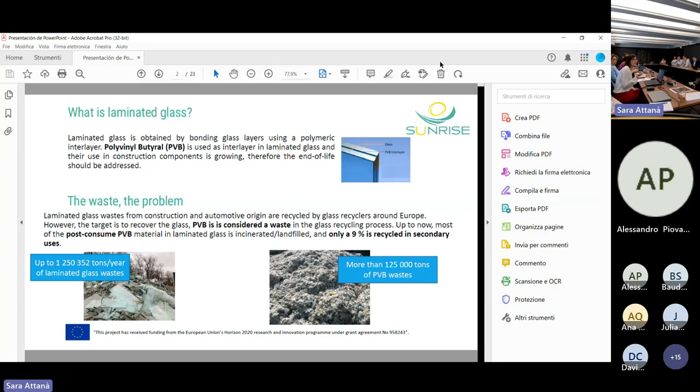This material in the recycling process is mostly considered a waste, because most of the time it ends in incineration or landfilling, and only a very small percentage is recycled. So what are the challenges for circular PVB recycling? There is some small recycling in minor applications, but the challenge is to recycle it for the same application or for a high quality application. Here there are 3 challenges we identified, but there could be more.

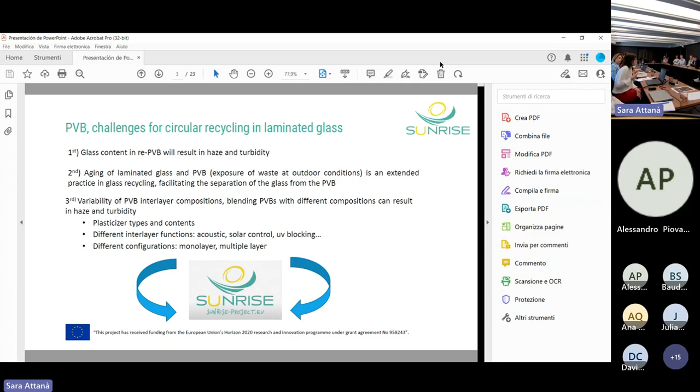One is the glass content in the recycled PVB, which results in haze and turbidity. The second one is the aging of the laminated glass and the PVB, because of the use phase, but also because sometimes it's aged by the recycling process. And the third challenge is the variability of PVB compositions. When we obtain this waste, it's a blend of different types of PVB, and could be a blend with other polymers which are not PVB. These different compositions and functionalities make it difficult to use it again. So this challenge created this project, the Sunrise project.

Some data about the project. This project was created during the pandemic, so we were very inspired by the pandemic in our houses writing. The starting date was 1st June 2021, and it has a duration of 3 and a half years.

We are now in the second year of the project, so we have one year and a half more of work to do. We are 20 partners in the consortium. The global budget is 9 and a half million, more or less, and the contribution from the European Commission is around 8 million. And Lurederra Technological Center is coordinating this project.

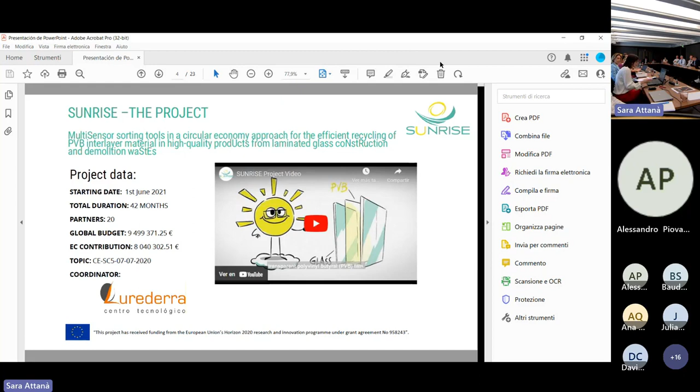Some background about this. Lurederra was working in the past on PVB recycling, not with the focus of this project, which is developing these sensor sorting tools, but was working in this recycling. Lurederra is a technological center, and we have different areas. Within these areas, we have areas related to recycling and environment.

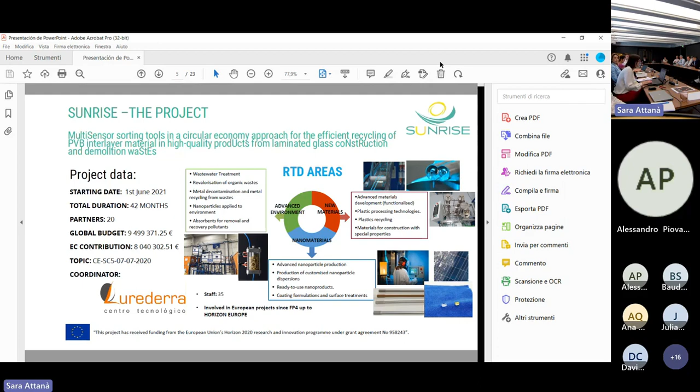In these areas of recycling, we work in recycling of different types of materials, some waste, electronic waste, biomechanical and solvent extraction processes, but we also have some areas related to materials, for example, plastic processing. So these areas mean that Lurederra has this knowledge and could act as coordinator. Also, we have some expertise from FP4 in European projects, so we sometimes have this role in projects as coordinator.

So once I have explained the background of why we are here today with this project, I will go to the structure and objectives. This project has four parts. One is we have some recyclers in the project, which work not only in the initial phase of the project, but also throughout the whole duration. Then we have a part related to the optimization and design of the recycling line. The project is based on developing a sorting system which can classify the PVB into different categories, the PVB while still in the glass, so we sort the laminated glass by PVB differences.

So this is the phase we have been involved in up to now in the project: the design of the sorting system, the methodologies, and also the optimization of the mechanical and chemical blocks. Now we will start the processing part. We will obtain PVB flakes categorized by different aspects, which I will comment on later. And we will make different formats for the different applications, like pellets, film, or dispersion.

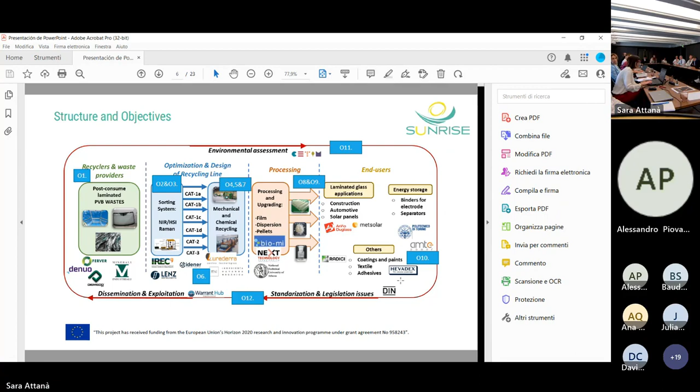And finally, we have an end phase related to the end use of these formats in different applications, for laminated glass, but also for energy storage, coatings and textiles. So these are the four phases of the project. We also have some global aspects related to standards and dissemination. This is our methodology. We have structured this work in 9 work packages.

Right now we are in the 24th month, so we have closed work package 1 regarding definition, and mostly closed work package 2 regarding the offline characterization of PVB, the methodology development, and the chemical and mechanical pilot line testing. We have also mostly closed work package 3 regarding the design, optimization, and construction of the sorting system.

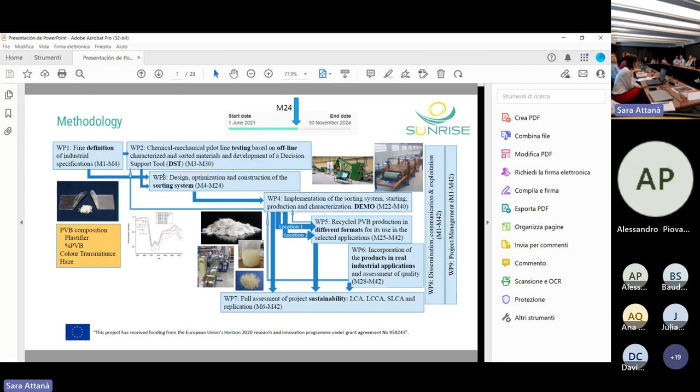So now I'm going to try to explain the most important objectives and where we are now, so that you can see the status. The first and most important objective of this project is to develop this multi-sensor tool to construct this system, which includes mechanical feeding, cutting, and positioning modules coupled to a multi-sensor tool, which subsequently goes to an actuator module to divide the different types of glass. This sorting system allows fast inspection and assessment, lower than 25 seconds, and it is a prototype, but we are aiming for 100 laminated glasses per hour.

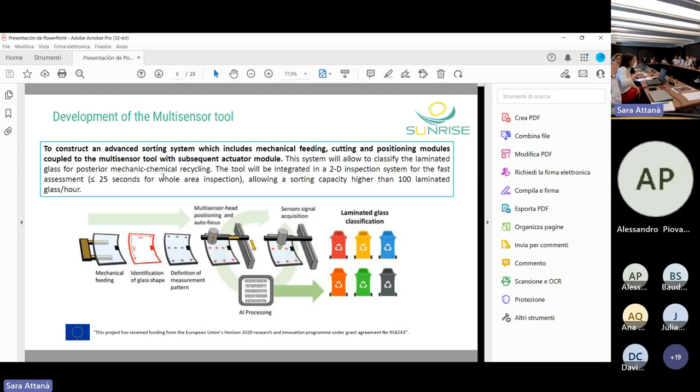So how does this work? This is configured as a step before conventional recycling. We assess the glass; this is a picture of a windscreen, but it could be another type of glass. In the project, we assess a sample, not the full windscreen, but it will be extrapolated later. We measure the windscreen, the sensor identifies the category according to PVB composition and quality, and then makes its decision and classifies it into a category. This could be a pre-sorting step in conventional recycling, by batches, for different treatment of the batches. So this is the idea of the sensor.

So what has been done in the project? The methodology we have followed is first to make offline characterization of PVB from reference materials and from waste using offline characterization techniques, including infrared spectroscopy, NMR, TGA, and others, in order to have a first database with the characterization results.

And in parallel, the PVB within laminated glass has been characterized by spectroscopic techniques. Different spectroscopic techniques have been used in the project, like Raman, NIR, transmittance, reflectance, fluorescence, and point spread function. And we selected among these for assessing our criteria. Right now, the selected ones are Raman and NIR spectroscopy, which can identify whether it is PVB or not, and can also identify the plasticizer type.

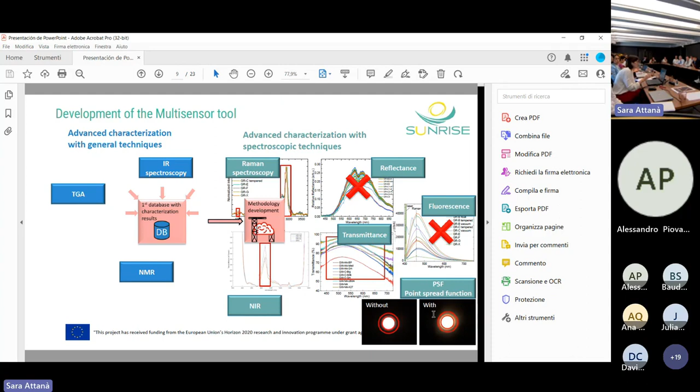For the degradation, according to transmittance and yellowness and haze, we evaluated with transmittance spectroscopy, and the haze can be assessed with a point spread function. So this methodology, developed according to these sensors, has been optimized and now this multi-sensor tool is being constructed.

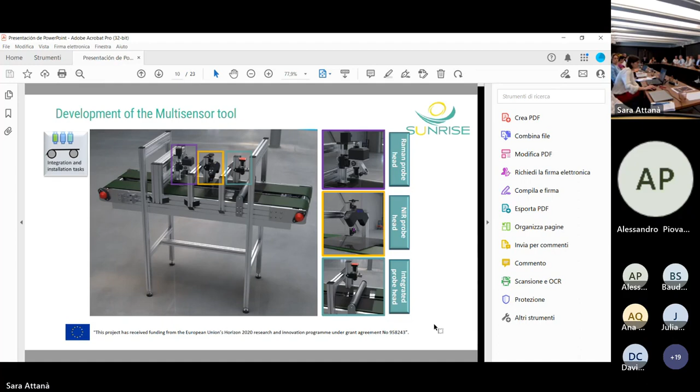Now something to comment about the sorting categories we have identified. According to this characterization, we use, in addition to the sensors, some artificial intelligence algorithms for assessment of the laminated glass waste, correlating the data with the target properties and sorting the laminated glass waste into different categories. I will explain these categories now.

The multi-sensor tool will identify category one, a high quality laminated glass waste which will be PVB, and in addition assess that it is high quality. The criteria of quality is done according to haze and yellowness, both giving similar results, so we identified haze as a faster measurement, setting a threshold of haze below 20%.

Within this high quality category, we will have different categories according to the type of plasticizer. We made a database of plasticizers, and in the final assessments we saw that most of the waste and materials have 3-ethylene glycol ethyl-hexanoate plasticizer, but in some occasions there are mixtures of this with other plasticizers. So we will probably have category 1A for only one plasticizer and 1B for a mixture of plasticizers.

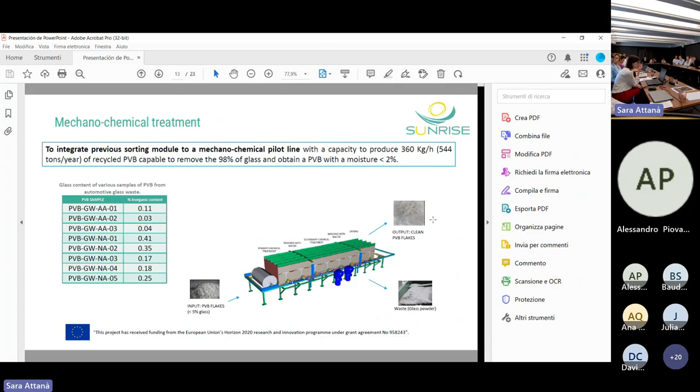In construction it's more challenging. It depends a lot on the variability of these wastes, because when we have very thick glasses, this also makes the process more difficult, but probably the mechanical conditions will be more improved. So that's about the mechanical recycling, mechanochemical, sorry.

Another objective of the project is related to the construction of a software tool, a decision support tool, for optimizing the recycling process.

The mechanochemical processes are modeled with semi-empirical equations that correlate well - first correlated with literature data, and now are going to be correlated with experimental data from the project. These equations will be modeled and programmed in a Python library.

This will then be connected to a web app constructed with Blazor. This app will allow the user to optimize the parameters according to, for example, how the content is in the beginning of the glass and how I would like to obtain it in the end - so to optimize the parameters according to the characteristics of the waste.

Finally, regarding technical aspects started just now - most of the work has been done on the sensor and methodology, but we have started preliminary tests of granulate and film production. Not with sorted material, because the system isn't constructed yet, but with mixed material, only classified as automotive or construction waste.

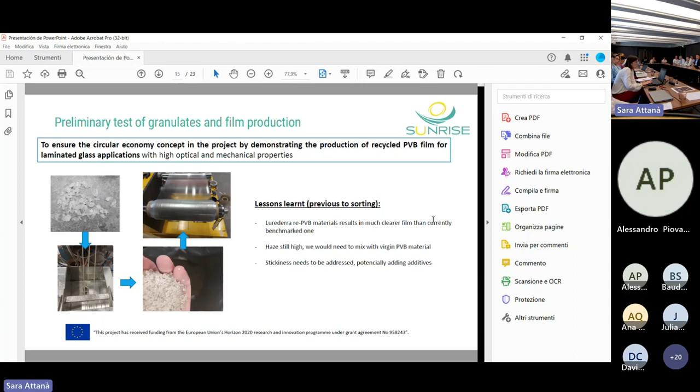Now we are entering the phase of the project where we are going to process this recycled PVB flake in order to additivate it for a new life. We will go more into this next year.

Other applications are another objective of the project - to revalorize other PVB fractions for other applications in coatings, carpets, and energy storage. I will not go deeply here, since some of the partners will present today, going into planning on this part.

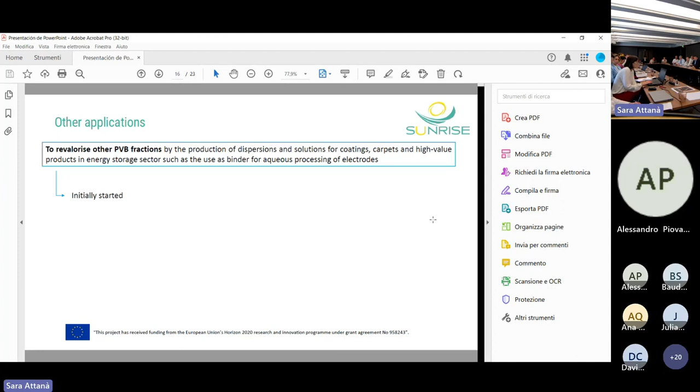Finally, regarding the first initial techno-economic and environmental outcomes, this work package about sustainability ran in parallel for most of the duration of the project. What we plan is to assess the economic and environmental impacts compared to current end-of-life scenarios and virgin production of PVB. So we planned some comparison of the process in that way.

Then we can compare with the current PVB end-of-life scenarios, like incineration and landfill. As the conventional recycling target is the glass, and as commented with Ferber, it will be separated, our steps are focusing on the PVB.

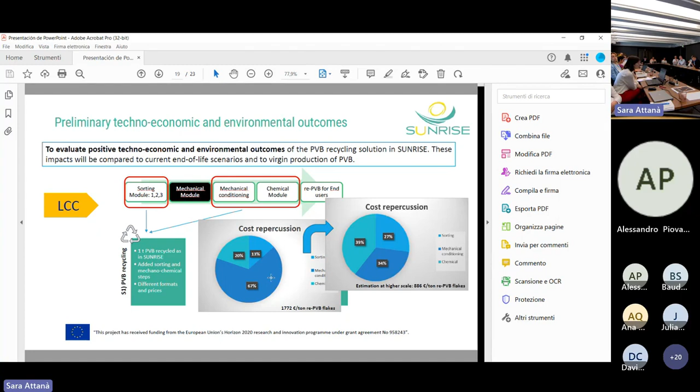Here we compare with some market prices of other recycled PVB flakes, and we were very close — around 1,000 euros per ton for recycled PVB flakes in the market from some providers. So we think this could be a very good opportunity. Of course this has to be reviewed, not only with estimations at higher scale for the mechanical part, but also for the sorting part, since we could extrapolate that to higher output too.

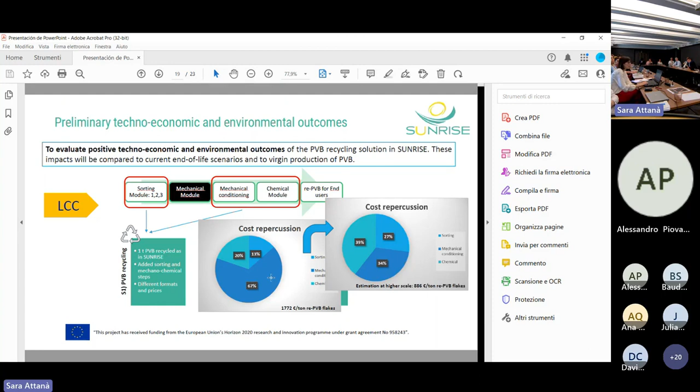We should also consider the benefit side, since these figures are costs only, without benefits included yet. But the results indicate that it's not just a matter of price — it's a matter of the PVB we obtain having real technical value and a market. So we could obtain this. Finally, to close, all this work I have presented has been done by the Sunrise project, which is a team of 20 partners.

I will mention the partners, divided by research partners: Lurederra, IREC, National Technical University of Athens, IDENER, Politecnico di Torino, and Next Technology Tecnotessile. Then we have business partners: equipment providers like Lenz and Ingeniería Navarra Mecánica in Spain, both of them. Then waste collection, materials recycling, and materials producers in the project: Minerali, Dismeco, Ferber Association, and Biomi.

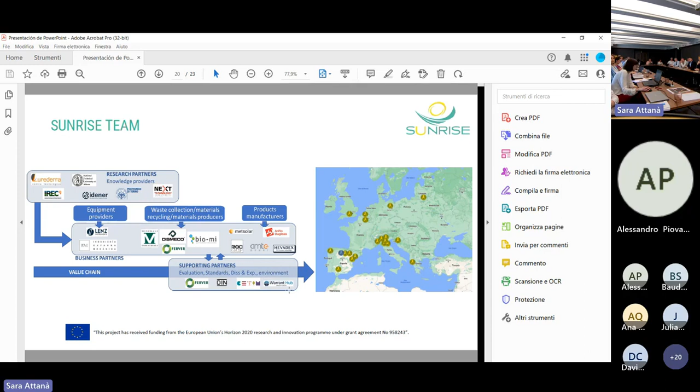And we have product manufacturers: Metsolar for the production of photovoltaics, Ariño Duglass for laminated glass in the railway and construction sector, Hevadex for coatings using PVB as a binder, AMTE Power in batteries, and Radici Group in textiles. Then in our value chain we have supporting partners: FERVER again as stakeholders, DIN Association for standards, the team for environmental assessment, and Warrant Hub for dissemination and similar activities. So this is our team.

And okay, this has been our first workshop here in Copenhagen, a very nice place. But we are planning a second one next year, probably in the same months, close to the summer. And we'll be in Urederra for seeing this demo sorting tool and the mechanochemical recycling facility in our facilities in Urederra in Spain. So we would like to motivate all of you to attend also this workshop.

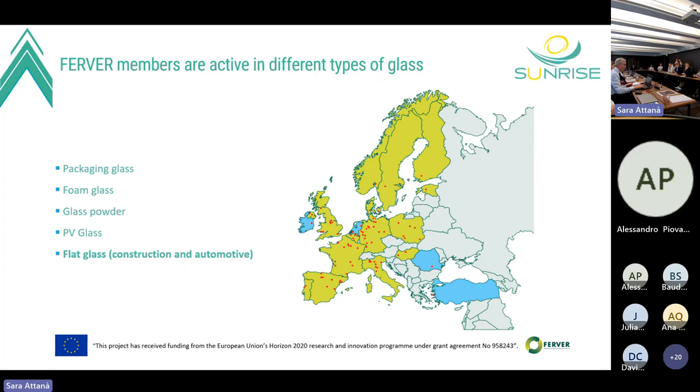Okay, we tried to have a picture of what is available as PVB on the European market. We launched a survey covering Europe and also some non-European countries. On our map, I forgot to mention, to clarify the situation: we have 3 non-EU members, being the UK now, Norway and Turkey. The other members are European.

And you see here, we launched a survey; we got answers from 24 members, 24 companies, from which 3 were outside Europe. And of the 24 answers we got, 21 were really active in flat glass recycling. We got this picture, the quantity you see on the screen: 1 million tons of laminated glass waste collected, generating roughly 80,000 tons of PVB, knowing that this PVB waste still contains some glass, roughly 10%. That's the reason why we have to work with Sunrise to purify the PVB and to try recycling it.

Just to give you some comparisons with the packaging glass, and that's one of the most important points in our activities now: for packaging glass in Europe, you have very clear and very strong legislation. Europe is now busy even moving the packaging and packaging waste directive into a regulation, making the rules more strict, more stringent, and a real level playing field between the countries, because all the rules will be applied de facto as such in each country. You have an obligation to selectively collect the glass from packaging, which is not the case for flat glass.

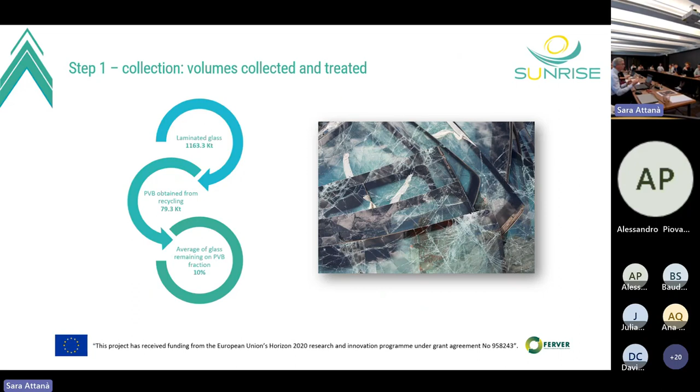For construction, it's the same. For construction, there are no specific targets for glass. There is only a global target at European level of 70%, and not even recycling, it's recovery. So energy recovery is also covered. And of course, to reach 70%, you don't need the small percentage of glass in a building. And if you have no pre-dismantling of the windows in a building in the context of demolition, once again, like for the car, you can forget it's recycled. Most of the flat glass now recycled comes from renovation activities, where we have, of course, replacement of windows and new kinds of pieces. Okay.

Then in the survey we did, you see roughly 63% of people got waste from construction and 33% from automotive. That's quite comparable with, let's say, the repartition of production, which from the European data is 83% from construction and 17% from cars. We have a little bit more presence of cars here. And the 21 plants we got information from are all recycling both categories. So we have no one recycling only one of the two categories. The other 4% represent probably pre-consumer waste that comes directly from the production sites.

When you see now what kind of laminated glass we collect, because of course, if we want to close the loop with PVB, we have to know the quality and the origin of the material. That was a multiple choice answer, therefore we don't have a sum of 100%. Most of the members get PVB glass coming from different sources: post-consumer laminated automotive glass from dismantling, from repair, even more, and it's clear that repair is like renovation in construction. When you have renovation, you have the glass clean. In repair, with the car glass colleagues, you have only glass. If it's end of life, that's more tricky. Demolition, the same: more renovation than demolition. And then, of course, pre-consumer laminated automotive and pre-consumer construction glass as well.

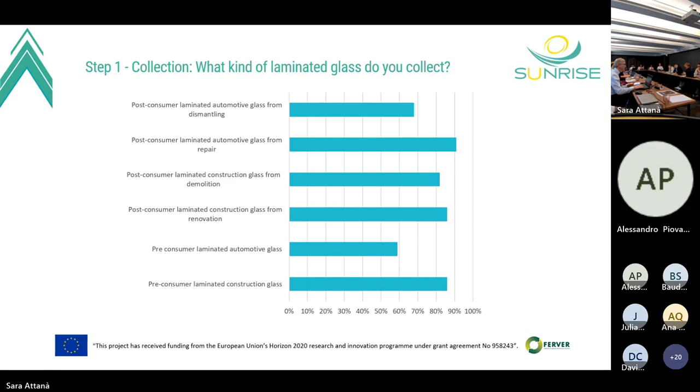An important aspect of the recycling is the storage. Of course, the 20 recyclers are glass recyclers. The activity is focused on glass, to deliver glass in the most efficient way. And you know that most of the glass is sold as raw material to produce new glass. In the survey we did within the members of FERVER, 90% of the glass the FERVER members recycle gets the stamp of European end of waste. That means it's again a product which can be used to produce new material, and in most cases to produce packaging again. Therefore, they do not pay too much attention now to the PVB, which is a waste.

And then we see more than 80% of the members having PVB on their plant store it outside, because it's the easiest place to store the material before exporting. Inside, less, and also more than 20% are mixing laminated and non-laminated glass.

We will see that's an important parameter in our study. The objective is, if we succeed in finding a good solution for, let's say, as closed a loop as possible for PVB recycling, we will have to pay more attention to the PVB. And one of the most sensitive issues for PVB is the reaction to ultraviolets. When you have UV on PVB, you have degradation of the polymer, and you can no longer use it because the transparency is reduced. Then you can use it as glue or something like that, but that's what we call downcycling instead of a closed loop.

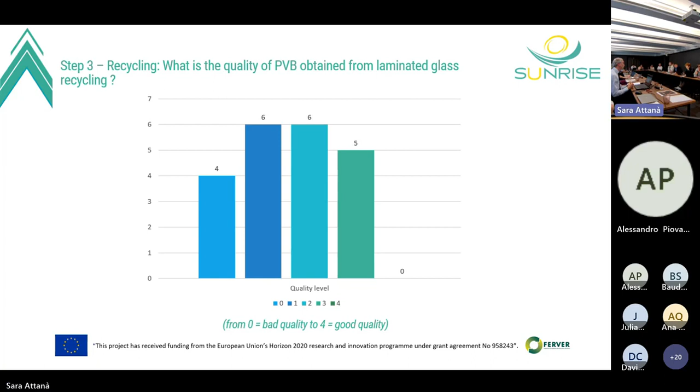Now, considering the destination today, you see roughly 40% goes to landfill. That's a pity, because when you see the price of PVB and the quality of this material, we dream to do much more than what we do with it today. In some countries, it's now forbidden to landfill organic material, so you have to go to waste-to-energy plants. That is considered officially by Europe as a recovery activity, 30%. And still, we are in the good direction, 20% are recycled. The other 11% is in most cases storage, in the hope of finding a better solution.

Now we saw what Angelica explained with the LCA and LCC ongoing. Not giving exact data, but most of the members and most of the recycling plants dealing with landfill, waste to energy, and even recycling today have to pay to get rid of the material due to the low value of the recycling processes. Some get limited positive value, or it is free of charge, but then they have the cost of transport. And that is certainly something we hope to modify.

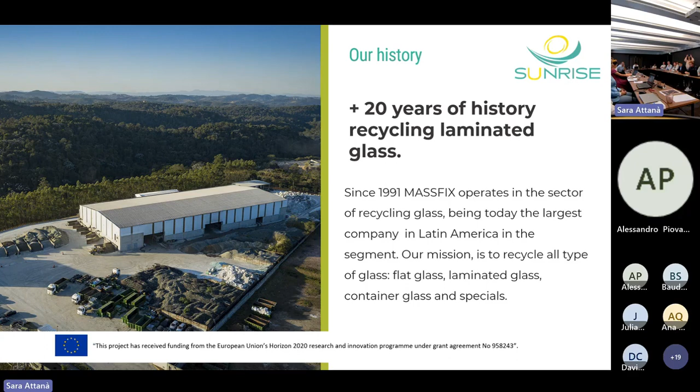MASSFIX is a glass recycling company, and at the beginning we were very focused on flat glass, then started with laminated glass, and since 2013, collection of packaging glass as well. I brought some numbers: last year we recycled 200,000 tons of cullet. We have 250 employees. Half of them are focused on logistics, because in Brazil we don't have an organized collection system, so we need to do the collection ourselves. So we have 72 trucks, we collect the cullet from our suppliers, and we serve 18 states.

We have 2 plants in São Paulo, and the majority of the glass industry is on the coast of Brazil, so we need to recycle our glass on the coast. We have 2 plants in São Paulo, 1 under construction in Minas Gerais, and some consolidation points where we can collect the glass in the area and then transfer it to a plant in São Paulo. Just to give you an idea, these consolidation points are 1,000 kilometers from our plants. So we have a very high logistics cost, and we don't use boats or trains, only trucks for transportation. This is our big challenge in Brazil.

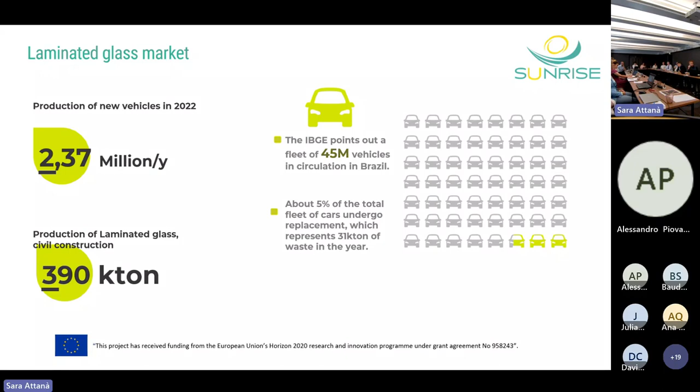Talking about the laminated glass market in Brazil, just some numbers. We produce 2.37 million cars per year, and our vehicle fleet is 45 million cars. About 5% of this fleet replaces their windshield per year, so we have a big amount of laminated glass. And in the civil construction market, we produce 390,000 tons of glass per year. We assume that 10% of that number is lost and is what we can recycle.

The circular chain of laminated glass: we have the flat glass industry, then the transformation into laminated glass, whether for vehicles or construction, then they distribute this glass, we recycle the glass, and then sell it again to the flat glass and container glass industry.

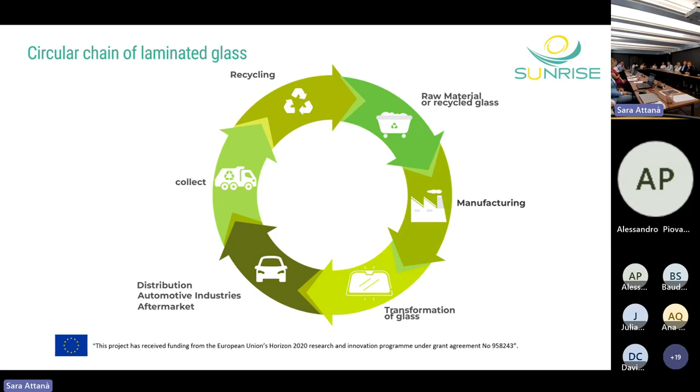The origins of the laminated glass that we collect: 43% is pre-consumer or industrial, and 57% is aftermarket, where we have a very high cost of collection, because we need to collect this glass point to point, and we don't have regulation of end-of-life vehicles in Brazil, which is a problem. And we have a very strong metal industry there that is starting to crush everything, the glass as well, which is a problem.

And we assume that we have 20 million cars abandoned in Brazil, so a lot of glass and a big opportunity to collect this glass. And in Brazil, we have different markets, like bulletproof glass. Last year, we collected 800 tons of this kind of material, where you can find a lot of PVB, and this is a market that is growing 30% a year.

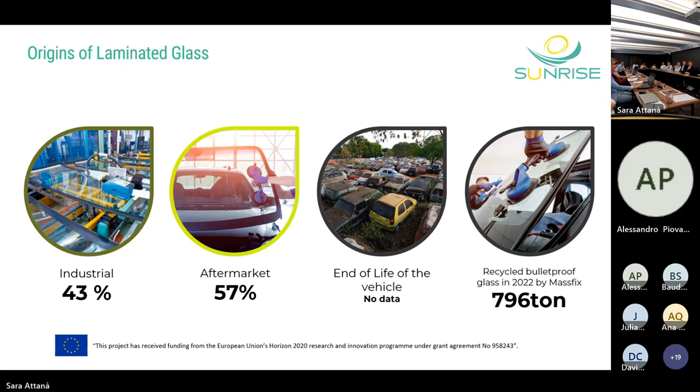Last year, we recycled 36,000 tons of laminated glass, and we are the biggest recycler in Brazil, but we have some other smaller recyclers doing the same job. And as I told you, the flat glass industry and the container glass industry are on the coast, so that's why we need to produce and collect only in this smaller area.

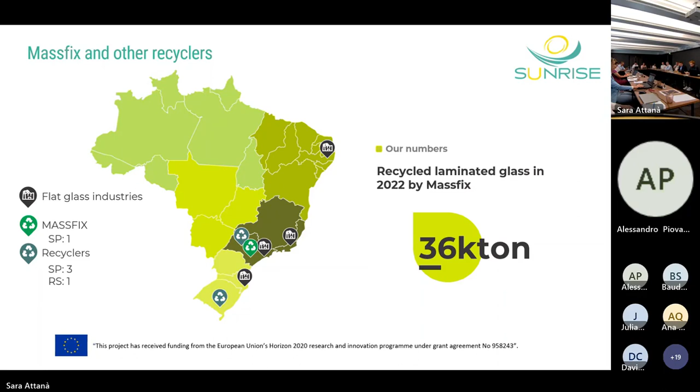Talking about our process, Baudouin showed us, and our numbers are very similar to yours. We have about 10% of glass in the PVB. Our process is a crushing and mechanical process where we crush, and then crush the material again to separate the glass from the PVB. We produce 300 tons of PVB per month, and 10% of it is glass. And this is our challenge in Brazil, and that's why we cannot give a more valuable destination to the PVB.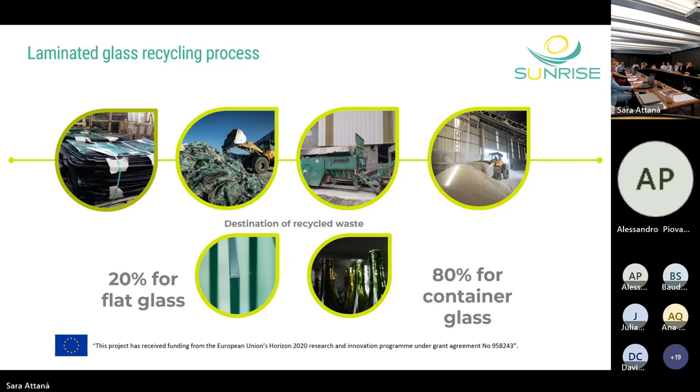And 20% of the glass recycled goes to the flat glass industry, and 80% goes to the container glass industry. And the PVB, as you heard, we send part of the waste material to waste-to-energy, and the biggest part to the landfill, and a smaller part, like 10%, to artisanal processes that can clean the PVB and aggregate it into other materials. We have in Brazil a very good market for clean PVB scrap. So they mix both of them and try to add a little more value to the PVB, but it's a small volume.

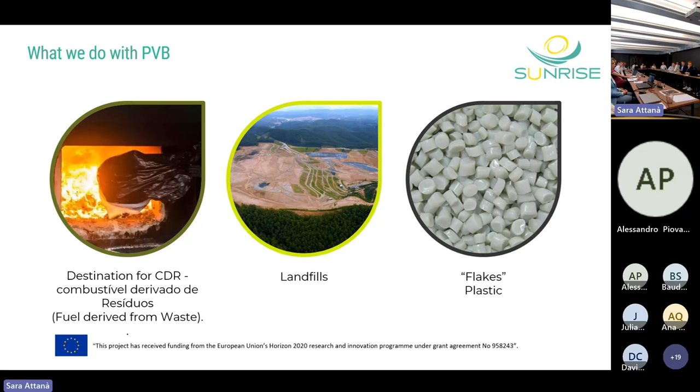And now in Brazil, we are developing some research with a university and with Saint-Gobain Research Brazil, which has a very good structure there. And 70% of their researchers now work on recyclable materials. So they are very focused on this kind of material.

Daniele Spinelli is one of our partners. He has a PhD in chemical sciences from the University of Siena in Italy. Since 2017, he has been working at Next Technology Tecnotessile as a member of the Chemical and Technological Research Unit to support companies in competitiveness improvement. He's experienced in EU-funded projects, both in Horizon 2020 and Horizon Europe, mainly related to textiles, sustainability, and circular economy. So, Daniele, if you want to start, the stage is yours.

Okay, thank you, Sarah, and thank you all for this opportunity. My name is Daniele Spinelli. I'm a project manager at Next Technology Tecnotessile. We are a research organization located in Italy, mainly in Prato. The organization was founded in 1972 with the main goal to push innovation for textile companies. So we are quite involved in research activities related to innovation in textiles, mainly at the product and process level.

We are a group of 21 people working mainly on research activities and also acting as a technological transfer institution, focusing on circular economy, sustainable textile, Industry 4.0, chemistry and nanotechnology, and ICT and photonics. Our institution is quite connected with companies and mainly with the needs of companies. Today, textile companies are searching for innovative solutions and also thinking of a possible link with other industries, connected with the industrial symbiosis concept.

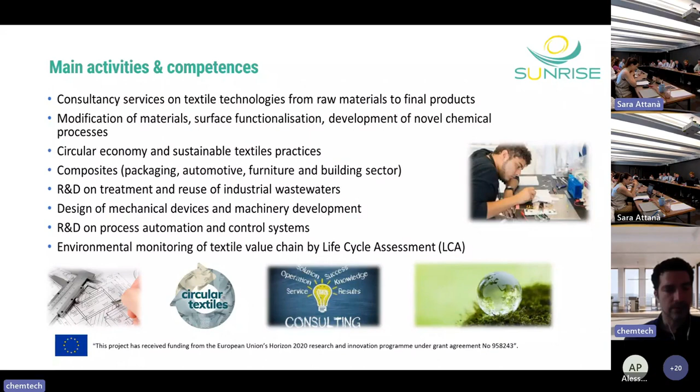Starting from 5 years ago, we are also supporting textile companies to evaluate the environmental footprint at the product and process level. For that, we are also consultant for the Prato Chamber of Commerce.

Going into a little detail about our involvement and interest in the textile sector regarding PVB: PVB is quite an interesting polymer because it can be used for different applications, and the possibility to valorize PVB by reusing it in a recycled form could be an advantage for the market, because manufacturing PVB from raw material uses more energy and is costly. So if we can find solutions to recycle PVB, we can also decrease the carbon footprint.

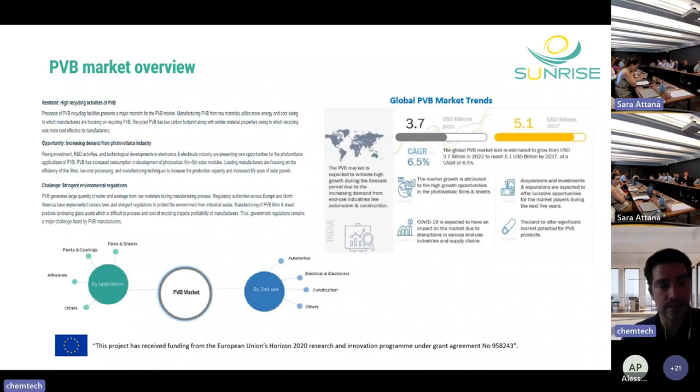It's an interesting opportunity because there is increasing demand for this polymer, for example for the photovoltaic industry. In Europe we are pushing a lot on the use of sustainable energies, and photovoltaics could be one of the key technologies to guide the European transition through a Green Deal approach. Another point is that we have different and stringent environmental regulations, meaning we should find a way to reuse PVB also for the market and for other applications that could be quite new, as in the case of textile coating.

Textile coating applications are quite interesting not only from an aesthetical point of view, but also from a functional point of view, mainly for technical textiles but also for the fashion industry. The sector is interested in functional solutions like hydro and oleophobicity, flame retardancy, or antimicrobial effects. There are many key properties we need to push for textile applications, also in medical, building, or automotive sectors. All these sectors are requiring a lot of functionalities.

One of the typical polymers used for coating of textiles is conventionally PVC or polyurethane based. The idea to use PVB, which is also a transparent polymer, for this type of application is really a challenge that we are thinking to promote during the Sunrise project execution.

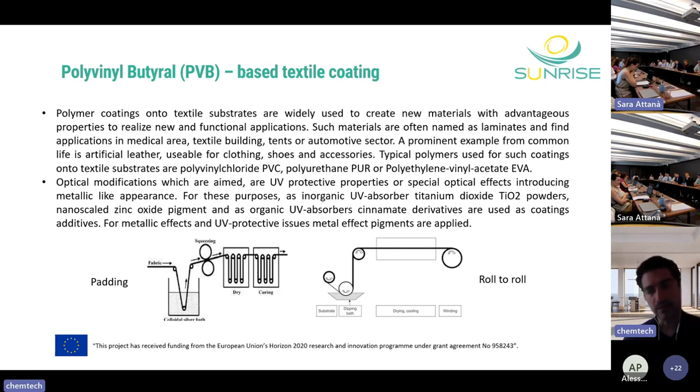Another point is that we are thinking to include different modifications of the polymer formulation, including different types of inorganic or organic derivatives that could be mixed with the polymer in a soluble form and applied directly on different textile substrates. I've reported here two common technologies, padding and roll-to-roll, to show that the goal is to work first on developing a polymer solution, including derivatives like powders or other inorganic or organic molecules or pigments, and to apply it directly on textile using conventional technology. The textile sector is searching for innovative solutions, but the idea is to apply this innovative option using conventional technologies already available on the market.

At the moment there are really few case studies of PVB application on textile structures, meaning more effort should be done in this field, since probably at the moment the main interest is to recycle the material for the same industrial application. But we think it could be a good opportunity to perform industrial tests for application on different textile substrates. There are some case studies mainly on application at yarn level, for example on polyamide and polyester, which are key materials for synthetic textiles.

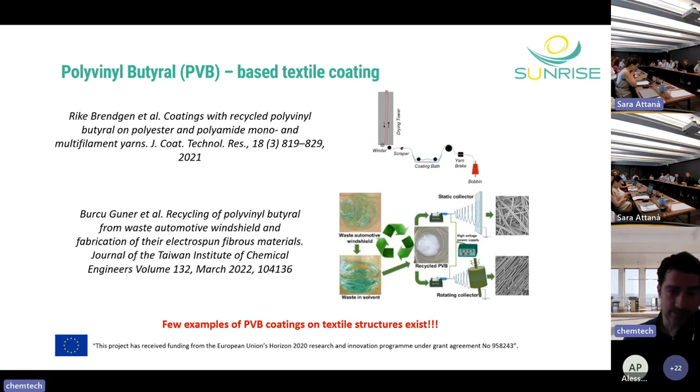But there are also other options like electrospun fibrous material that could be used for applications in insulation materials, for example coatings on insulation materials mainly based on non-woven layers.

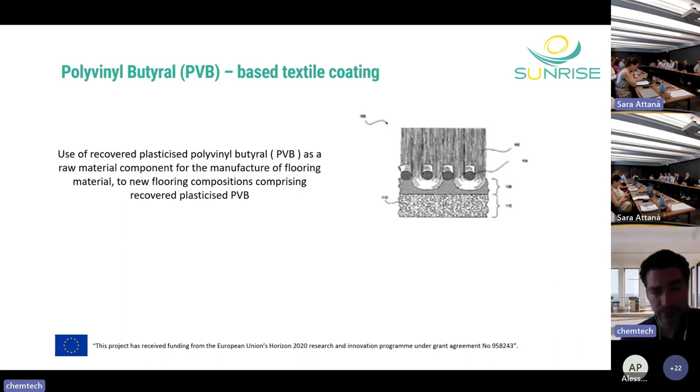Another interesting application we pursue during the project is related to the substitution of PVB for carpet manufacturing. This part is quite interesting because the main idea is to find different formulations, including recycled PVB, to substitute latex during the manufacturing of flooring material, mainly to substitute the back coating material latex used in commercial applications. These are the two main target applications we're covering during the project itself. These activities will be performed in combination between NTT and Radici Pietro, one of the Italian companies that is a leader in carpet manufacturing.

We are thinking also to cooperate with them to develop a different dispersion-based formulation, starting from the key parameters currently involved in the formulation of latex back coating for carpets.

For application of coatings on different textile substrates, we will involve a textile finishing line available at our site. The final results we are aiming to reach are quite ambitious, but also in line with the expectations of the European textile strategy. From our side, we will continue this type of development and also try to find synergies with other industrial sectors. That's all from my side.

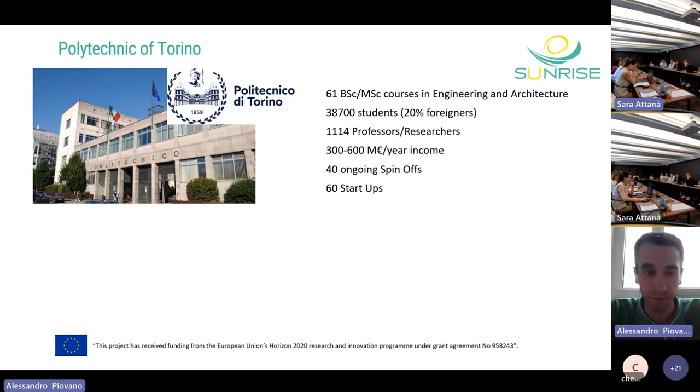Our department is the Department of Applied Science and Technology, the second major department at the Polytechnic of Torino. It covers different scientific sectors, from fundamental principles to application at lab scale, and in some cases to pilot plants. The staff counts more than 150 professors and researchers, together with more than 200 postdocs and PhD students.

Our research group is the Group for Applied Materials and Electrochemistry, whose focus is the development of innovative, low-cost, and environmentally friendly materials for energy storage and conversion devices, such as lithium-ion batteries, in particular with a focus on solid-state batteries, sodium-ion batteries, and also next-generation batteries based on different redox chemistry, such as zinc-air batteries.

The GAME Lab is also part of an Italian consortium called GISEL, which groups together several Italian research centers and companies, and provides shared facilities and expertise.

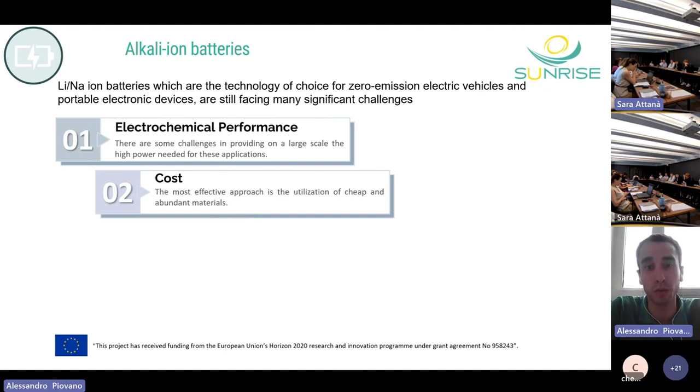Speaking about alkali-ion batteries, they are the main technology for electric vehicles and portable electronic devices. But despite their widespread use, they still face many significant challenges related to performance, in order to improve the power they are able to provide, and the cost, in order to use cheaper and more abundant materials.

There's also safety, in order to avoid fire, explosion, leakages, and other hazards, and finally sustainability, in order to reduce the use of critical raw materials and to increase the durability of the batteries.

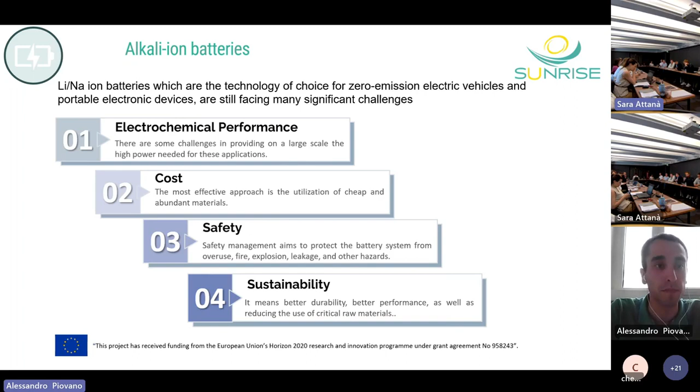For a general introduction, batteries are commonly made by two electrodes, the anode and the cathode, an electrolyte, and a separator. But if we look at the materials inside the batteries, inside the electrodes we have many materials, including the active materials, conductive carbons to provide electric conduction, metal foils used as current collectors, and the binder.

With respect to all of these materials, the aim is always to try to break down the cost. Here you see two graphs showing the composition of lithium-ion batteries and sodium-ion batteries with different materials and different costs of the materials.

In particular, the polymer materials are present in the separator and in the binder that is present inside the electrodes.

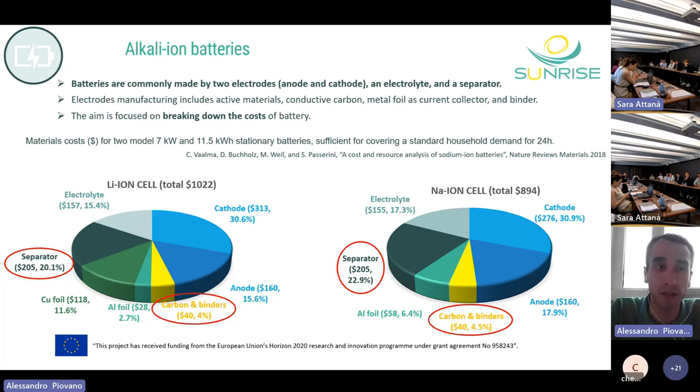For what concerns our role in the Sunrise project, which is trying to use recycled PVB in batteries, we are exploring the possibility of using PVB as a binder, which has a considerable impact on cell performance because it provides strength within the film substrate and provides good contact between the electrode materials.

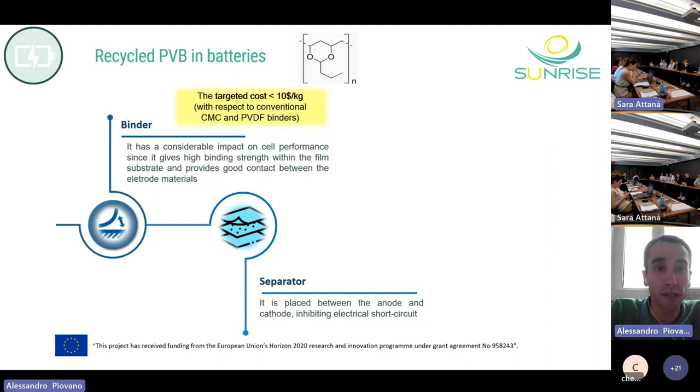According to our market research, our target cost is lower than $10 per kilo in order to be competitive with conventional binders such as carboxymethyl cellulose and polyvinylidene fluoride.

We are also trying to use recycled PVB as a separator, placed between the anode and the cathode, to prevent electrical short circuits. In this case, the separator must be permeable to the liquid electrolyte, and the target cost is lower than $60 per kilogram, compared to conventional separators based on polypropylene and polyethylene.

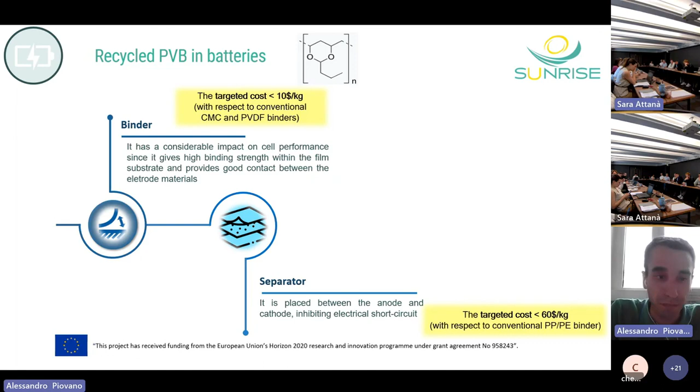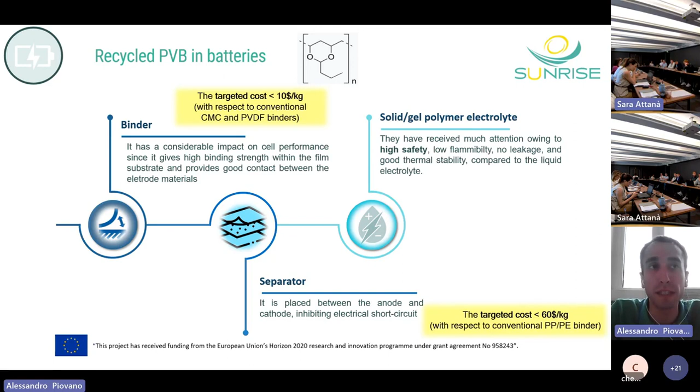And finally, the most ambitious, high-risk and high-gain research is focused on the development of solid polymer electrolytes for all-solid-state batteries. In this case, the polymer membrane contains the electrolyte. This way, there is low flammability, we can prevent leakages, and provide good thermal stability. But to achieve these ambitious results, we have to chemically modify the polymer to enhance its mechanical and chemical properties and to provide sufficient compatibility with the movement of ions inside.

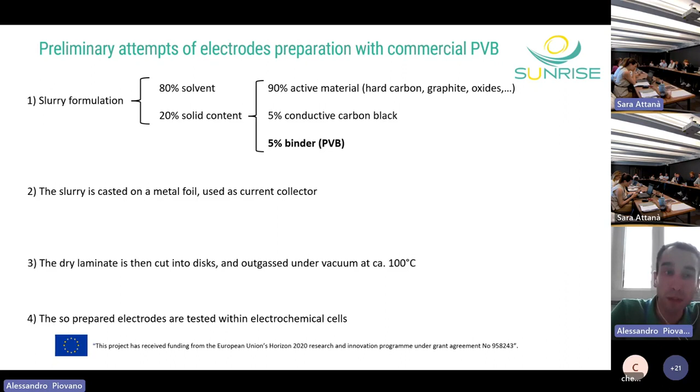We have already done some preliminary attempts at preparing electrodes with PVB as a binder. We started with pure commercial PVB for this preliminary test. For the preparation of the electrodes, first we have to prepare a slurry that contains a solvent and the solid content, which is the material of the electrode.

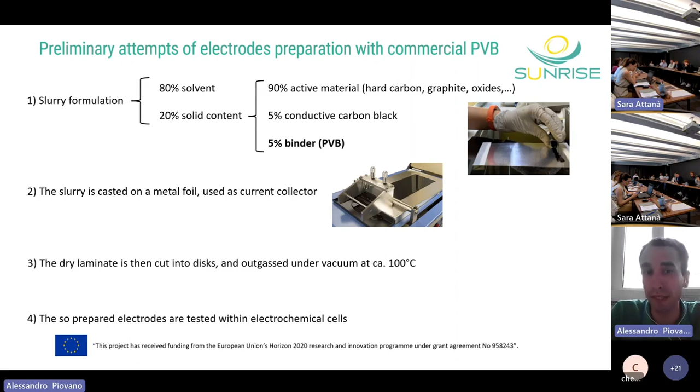The solid content is composed of the active material, which can vary depending on the anode or cathode, the conductive carbon black, and the binder. Then the slurry is cast onto a metal foil used as current collector. The dry laminate is then cut into discs and outgassed under vacuum at 100 degrees. Finally, the prepared electrodes are tested within electrochemical cells.

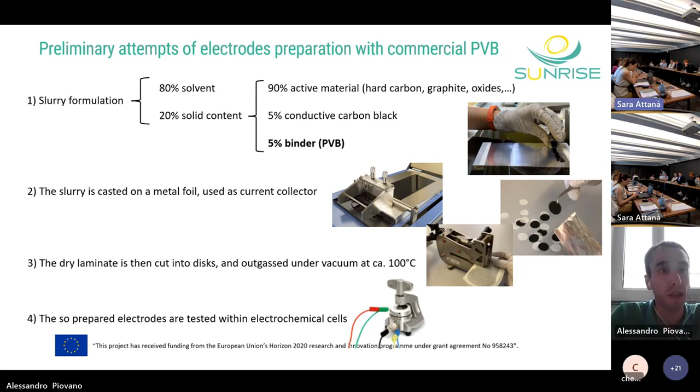So some attempts to improve the performances are to add some oxalic acid in the slurry that polishes the surface of the metal foil and increases the adhesion between the electrode and the current collector. To increase the amount of the binder in the slurry preparation, to test different solvents in order to modify and to properly tune the dispersion of the solid content and the viscosity of the slurry.

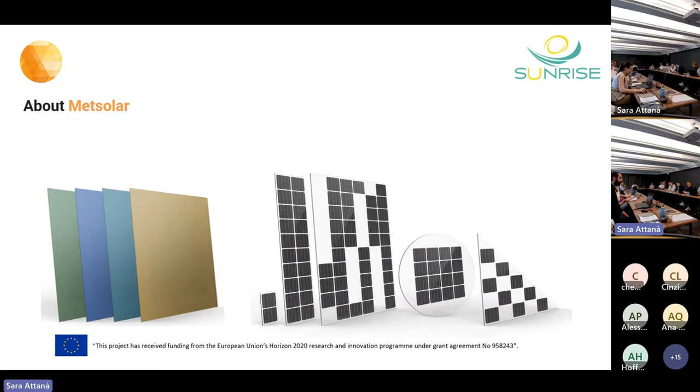And also about Metsolar, which is the partner of the project working on the research and development. These are our activities. What we do is material synthesis, sol-gel methods, and energy efficient building solutions. As there's growing interest in building integrated photovoltaics, we are doing some research on tandem cells. That is the next step from our current market leader, silicon, which is approaching saturation now. And if you want to improve efficiency, we need to go to the tandems.

We are doing some simulations of solar cells and panels. Also, carbon footprint calculation is getting more and more important nowadays. Also, energy efficiency solutions for buildings and industrial processes.

And some photos, we can show some of our activities. Like here, we have a module system for data collection of power generation, and we are working on artificial intelligence for fault detection in PV systems, and a meteorological station for collecting meteorological data.

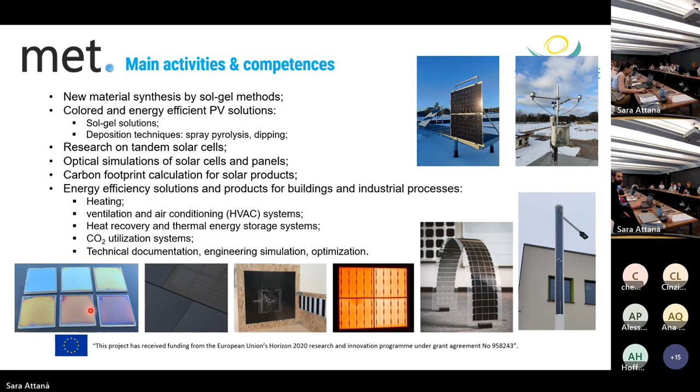And in this project, we are using recycled PVB. We will be using recycled PVB to make solar panels to test if it can be better than EVA, the other encapsulant, which is now usually used in the industry to laminate cells. So I think one of the most important things is to compare, and if you want to make it commercial, you want to make it somehow better in the final panel.

So we will optimize the lamination process, then do some characterizations, and also do climatic tests to test if these panels can be reliable and withstand many years out in the field. These climatic tests are, for example, high temperature, high humidity, high and low temperature changing fast. So they test extreme conditions to see if materials can withstand it.

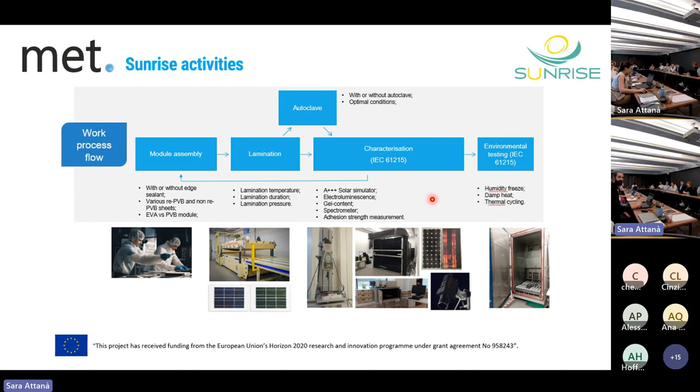And also, we work in a feedback way. We receive some sheets, we try to make them, and if we get good results, we will try to improve it. Panels made with PVB should have better adhesion properties, which would actually result in a higher lifetime. This is what we suppose. Also, because it's greener, it's a cheaper product and can be more competitive.

The disadvantage of this material is that it has a higher water penetration rate, which requires additional edge sealant in the panels so as not to allow water penetration. And also, the lamination process can be more difficult because in some cases an autoclave must be used.

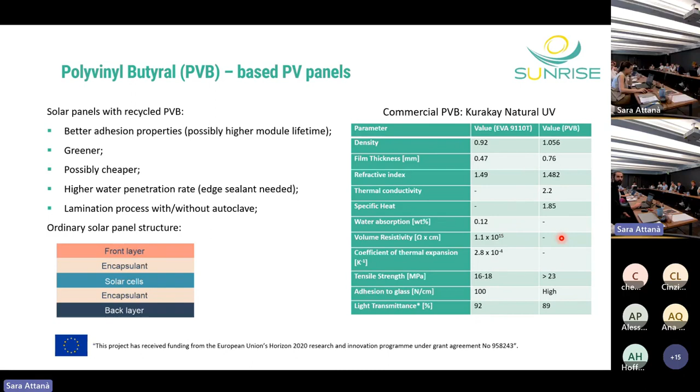However, after some thermocycling tests, we found a lot of bubbles in the laminated glass. So we will compare this and do the backsheet. In the industry, there are two main module types. One is glass-glass, glass on both sides, and the other is glass-backsheet. The backsheet is a polymer, which makes it a bit lighter, but a bit less resistant.

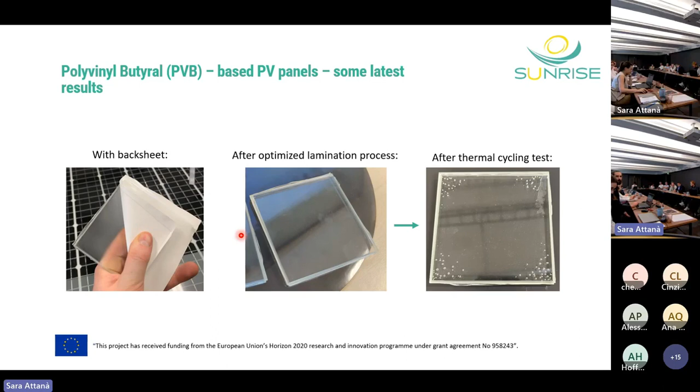So in this case, we obtained very low adhesion. We could tear it by hand. So more tests will be needed. That's about it. Any questions?

Okay. Any questions? No? Questions from the audience, but now you have to talk and ask questions, because this second part of our event is organized as a roundtable. The idea is to ask you some questions and get your feedback regarding the technology that Sunrise is developing. Angelica, do you want to? Yes, I give you the floor. If you want to stay here, I put the microphone here.

Okay, the idea is to have your feedback. So I have thought about some questions. We have here in the audience different perspectives: the recyclers, the manufacturers of glass, and the PV manufacturers. So some questions will focus more on some of these sectors, but of course everybody can provide their opinion.